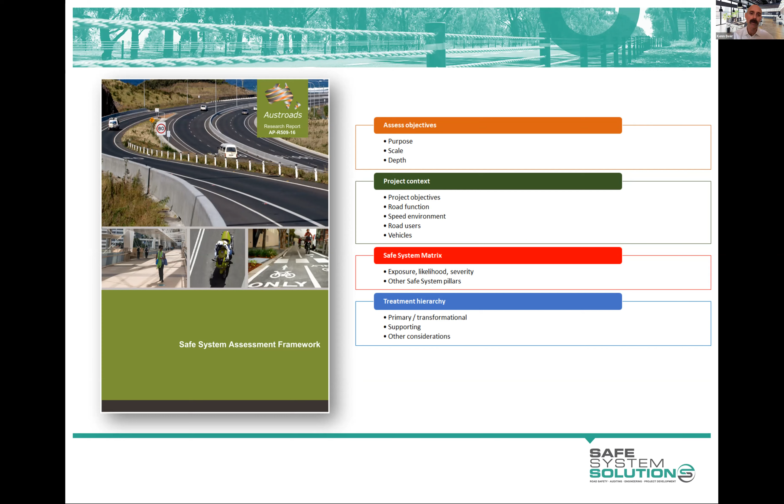So since its release, two jurisdictions have put out supplementary guidelines, that's Victoria and South Australia, to try to clarify some of the things that Austroads was very unclear about, to actually say, Austroads said this, but we actually, in practice, are going to do this because, as I said, there hadn't been any Safe System assessments done when that document was released. So some of these jurisdictions found out when they were doing them that they needed something to be altered a little bit. So there's some slight variations within these documents.

The process I'll be talking you through sort of aligns with these documents and Austroads, and I'll point out where there's just one or two little things that you need to keep in mind if you're just solely following the Austroads document. Like always, pop your questions into the chat as we go, but I'm going to start at the end. And this is one of the outputs of a Safe System assessment.

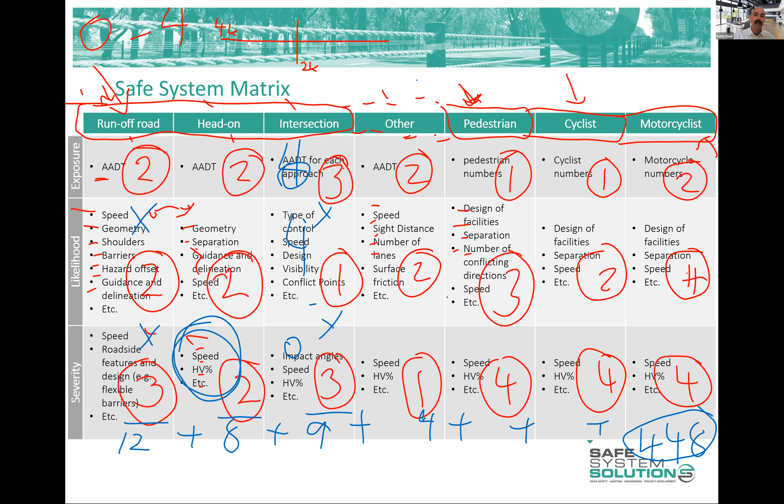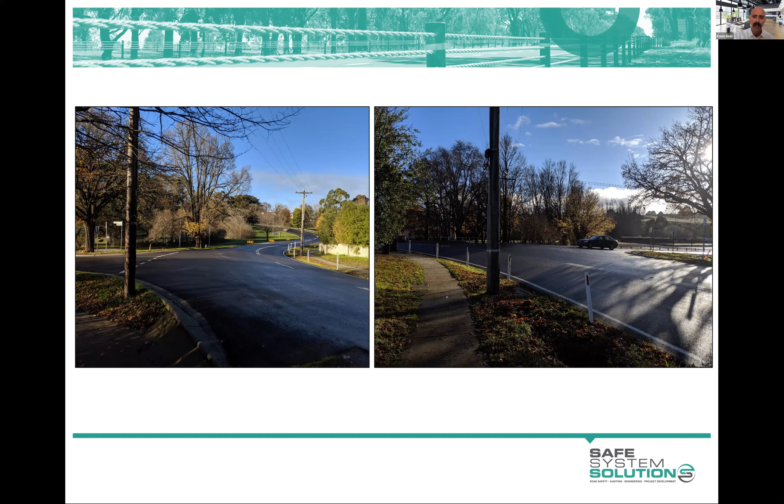They're planning to either build a roundabout at that location, or to build a signalised intersection using the existing road alignment, or to build a conventional T intersection with the signalisation and some lanes and the like.

So what we do first is take the existing conditions, the existing road environment, and say, how many vehicles are exposed to crashes? Now, we don't need a huge amount of information written into this cell, because you just use the scoring reference sheets and you just put in your numbers.

The likelihood, though, you see factors that increase the likelihood, and they're dot pointed out, and factors that decrease the likelihood, and they're dot pointed out. And head-on crashes, factors that increase the likelihood, factors that decrease the likelihood, and they're dot pointed out, and then a score is put in there.

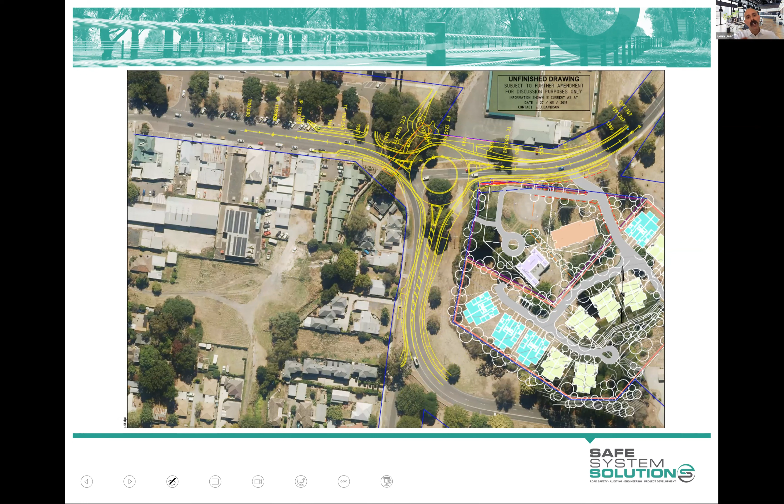Then what you do is you copy this, the whole table, and you paste it. And you look at their design. You saw there was a design of a roundabout. Go back to it actually, just so you can see. So there you go. Now you look at the roundabout and you imagine that built. Okay, they've built this roundabout just like it is on this design. You go to that existing conditions matrix that you have created, you've copied and you've pasted, and you start to manipulate it by saying, okay, I'm going to cross this out because those have been removed.

Those have been removed. But I've got to add these things in here because they decrease the likelihood, and we haven't accounted for those. And we're going to move this score down. Cross these ones out, add this one, change that one. Not too many changes on the severity, okay. Bit of a change here, bit of a cross out. So you can see you're using your existing conditions as the base and then you're changing. And you do that for each of the designs they give you.

So you go back and you get the existing conditions matrix here, copy it again, paste it for your signalized modified T, and go through and make changes and alterations. Then you go back and you get the existing conditions matrix again. You paste it. You make changes to it based on the conventional T. You keep doing that for as many design options as are provided to you. And that gives you then the ability to get total scores.

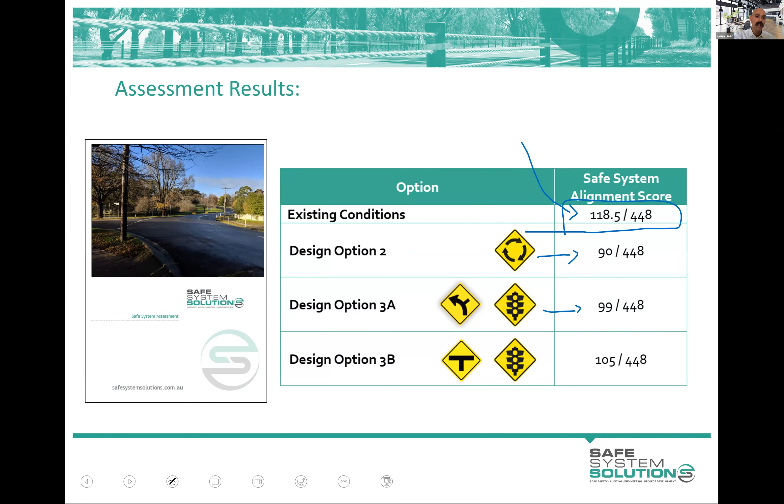And you could say, okay, for the existing site, we've got 118.5 as the safe system alignment score. The roundabout brought that down to 90, the modified T to 99, the conventional T to 105. So everything's making it a bit safer, a bit more aligned with safe system principles. The roundabout happened to do the best job of that. There would be further things that could be done. It's at 90; could we get it lower than that? We'll talk about those shortly. But that helps the project team, at least at one point, to be able to make some decisions or add this into their consideration.

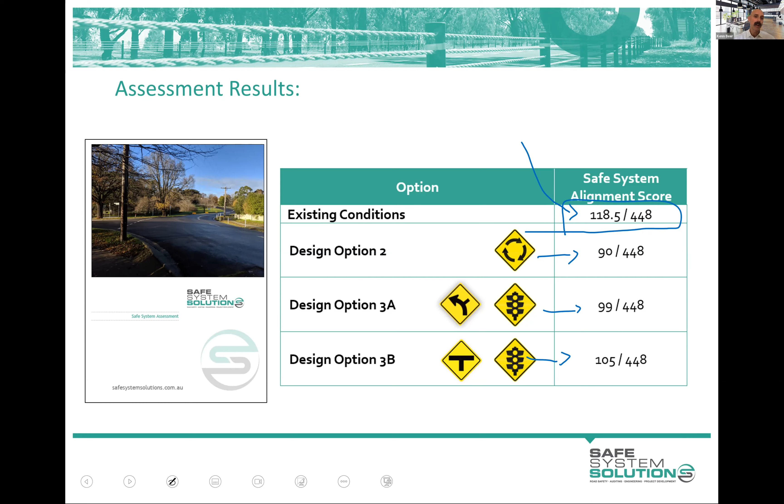But I do like this better as the output to look at, because you're immediately able to see, okay, the roundabout's doing a good job everywhere, although we're a bit worried about the cyclist one. The roundabout was the lowest score, but a lot of that score is dominated by cyclists. So maybe there's more we could do to reduce the risk for cyclists, or you gather this sort of intel. Or maybe there's a decision made, no, we actually have to go with this option. So where are we getting risk, and how do we reduce these scores as much as we can?

And that's what you do then as an assessor, is to say for each of these options, the roundabout, the modified T signalized, the conventional T signalized, and all the other options, what could this project team do to make that even better aligned with safe system principles? And these are recommendations, ideas for the project team to consider.

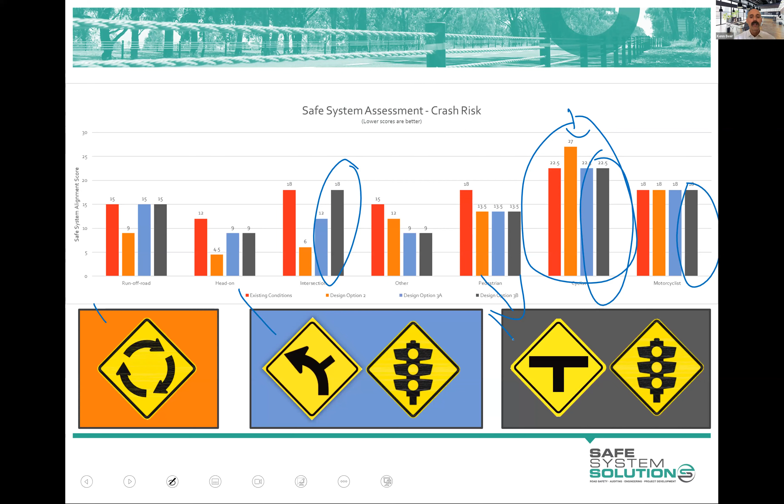And we categorize those into either primary, that virtually eliminate the potential for death or serious injury, or supporting. Supporting are good road safety treatments, but they're not expected to virtually eliminate the potential for fatal or serious injury crashes within that column.

So Austroads has provided within the Safe System Assessment Framework a whole list of primary treatments for different crash types and a whole list of supporting treatments for different crash types, which may spark ideas for you. A lot of the time, things like, we were just talking about median barriers. Median barriers are a primary treatment. Roundabouts are a primary treatment for that intersection crash with passenger vehicles. It may need some more tweaks for other road users.

So a lot of the stuff that's been a bit more traditional, like signs, lines, surface conditions, they're supporting treatments. They're good. We want to get all of that right. But we know that even if you get a high-speed road with really great surface, good line marking, a bit of sealed shoulders, good signage and everything like that, people can still leave that road, and they will leave that road, or they'll leave their lane and they'll enter the other lane. So we know that it's not eliminating that crash potential.

So we are going to ask you to go to a site. We're going to give a design to you, and it'll be close to the address you've given us. And we'll ask you to go out there because you're going to try and do an assessment of the existing conditions, and then you're going to imagine the design built at that site. And we want you wearing a high-vis vest when you're out there. We don't need you to be out there measuring lane width or anything like that. So you can just stay back and observe the site.

We don't want you to be a hazard to others in any way, making them walk around you onto the road or anything like that. We want you to park safely. We've looked at all these sites to ensure that they can be done safely by you.

But make sure you park safely, don't block people's sight lines or those sorts of things. And we've got a safe work method statement, which I'm going to jump you into shortly and show you, which is just to try to ensure that you will do your part in being safe when you're out there as well. We've done our risk assessments and made sure that they're low risk for you to go out there. But we just need to make sure you're going to be acting accordingly.

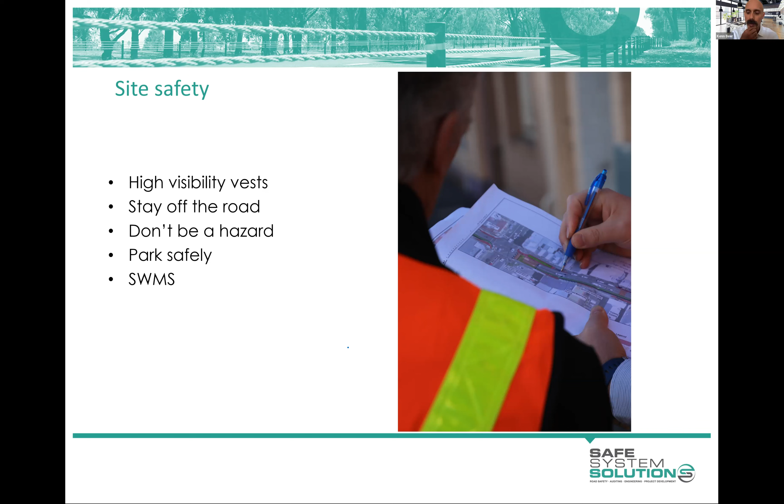So I'm going to stop the slides here, and I'm going to jump into the learning management system, but happy to answer anybody's questions as they come up. Okay, there it is. Okay, so you're all very familiar with the learning management system. One thing I will point out while I'm here is in the reference documents and resources, you've got the TMR templates. Don't use those for the assignment, but if you want to use those, that's all in there.

This one, the Safe System Assessment Framework. If you open that up and you jump down to around page 17, 18, you can see pedestrian treatments, and you can see their options, treatments, and their primary treatments. Then these ones are supporting treatments.

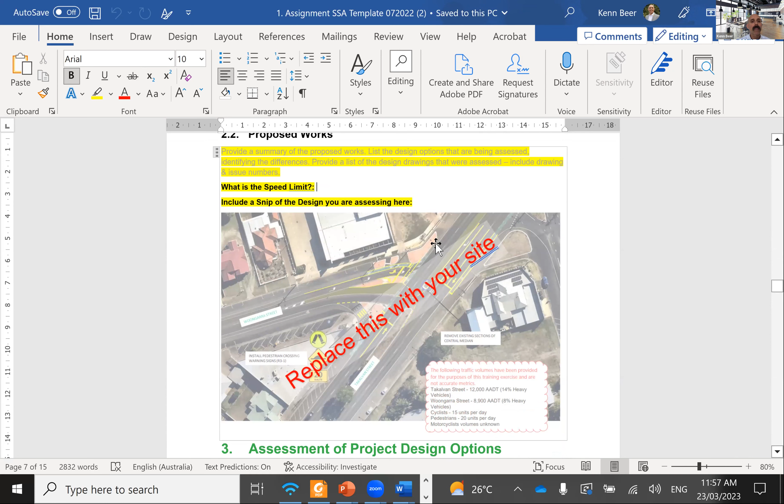Then a bit of a description of the proposed work, the existing speed limit at that location, a snip of the design, so it's there, so it's packaged up nicely. An assessment summary, well, you do this at the end because you can't summarize it until you've sort of been through it all. The scores of the existing conditions and the score of that one design that we've given you. And a graph. Well, you've got to fill out all your matrix first before you get to the graph, but I'll show you that in a second.

So then you fill out your matrix and you start with the existing conditions. And for this one, you're going to write a bit of information in there, and you're going to put a score for existing conditions. You're not going to put a score for the design. Try to spell that out here. So there we go. Because for the existing conditions, you don't have a design to score yet. You can fill some dot points out here, maybe 4 or 5 things to fill out there. Maybe fill a few out here. And then you're going to put an existing condition score there based on what you're doing. So you fill all of this out.

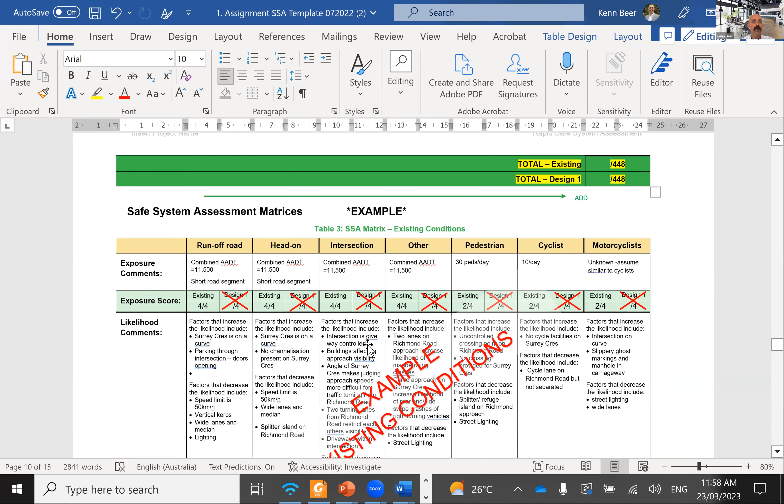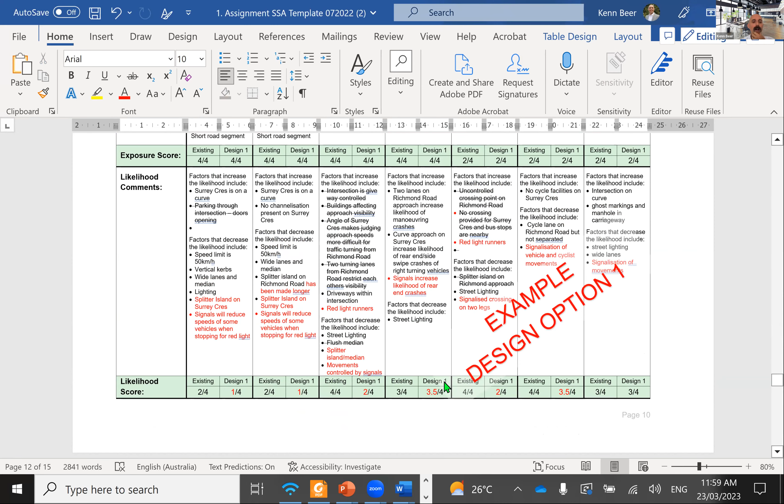Once you're happy with it all, you're going to copy the whole thing and down. So here's an example of the existing conditions. You can see there's no scores in there. And then an example of design. So you can see it's got scores in the design bit as well. Delete that. And then you're going to put yours in. Paste it in there and go, yeah, great, okay. No, those ones have been removed. Strike those through. Although we've added this new one, so we've got to put that in there. And the new score goes down to 1. Just make that red so everybody knows that's new. And there you go. You do that throughout the whole thing.

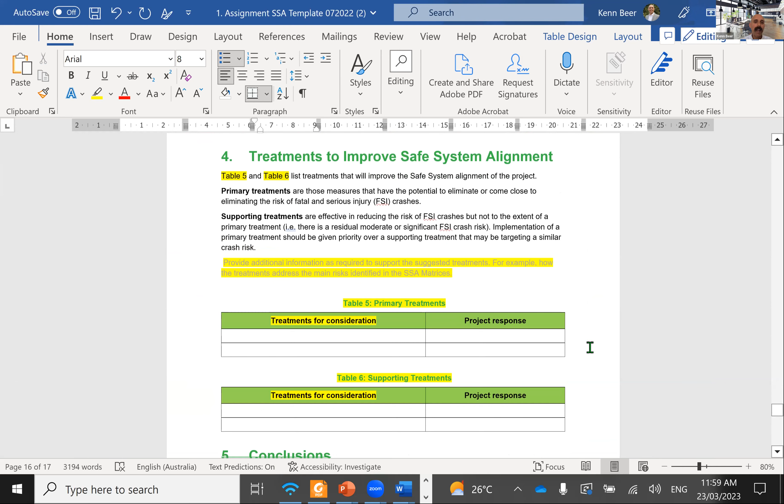So that's that. And then for that design that you were provided, you're going to do some pondering and thinking, hey, how do we make this better? How do we make this better aligned with safe system principles? And you come up with some ideas and you write an idea in here, a median barrier. Primary treatment. Maybe you'd flesh that out a bit. Type of barrier, where you might start it and end it. You don't need to do the design for them, but those are the sort of things.

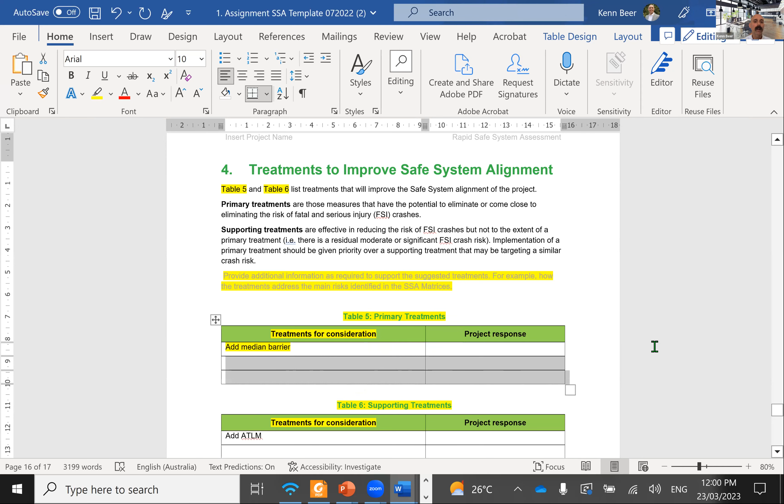And audio tactile line marking. So that would be a supporting treatment. Good treatment, not going to virtually eliminate run-off-road crashes, but it's something that you can do. And you list a few of them, as many as you want. Add some rows if you want. And you can add a few. You don't need to write a conclusion for us.

And then the last thing we want you to do is a picture of you on the site with a high-vis vest on. Prove to us that you actually went there, you looked at it. It's one of our requirements to complete a safe system assessment course. Back before we did anything online, we'd all go out to different sites in small groups, and we'd come around. But this one, you're going to do it because it's close to your home and the like, but we need to tick off, yep, they went to a site, they looked at it, they're actually looking at real world stuff.

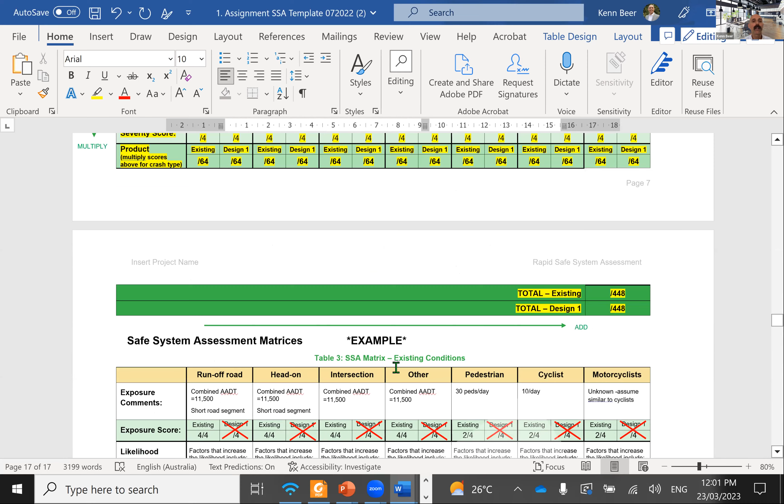And that's it. So then you will take that. Oh, sorry. You filled out your matrix, you got all these scores. Then you're going to come back up here and you're going to want to put those total scores in here, and you're going to want to put a graph in here. To make your life a bit easier, I think I've got it open here. Yeah, a little graph generator in Excel. You'll do this yourself in 5 minutes, but we're just trying to save you a bit of time. Put your scores in.

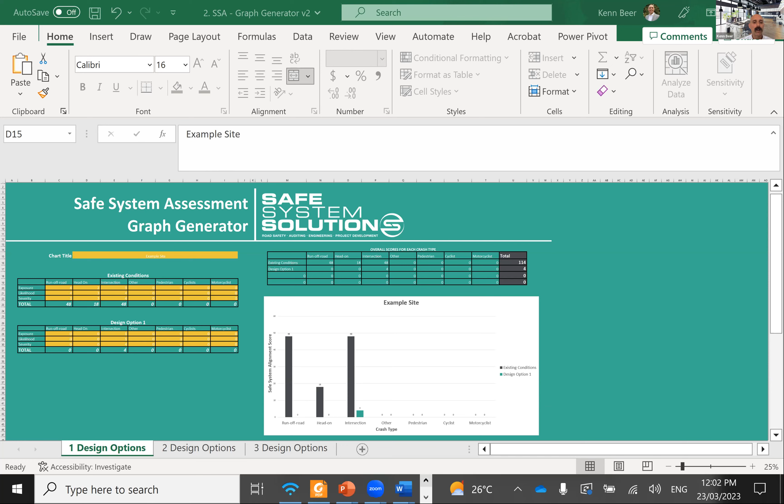And it produces scores for you for the existing conditions, and then for the design. And you can then just snip that and go back to here and replace this one with that new one. Okay. So I've covered a bit there.

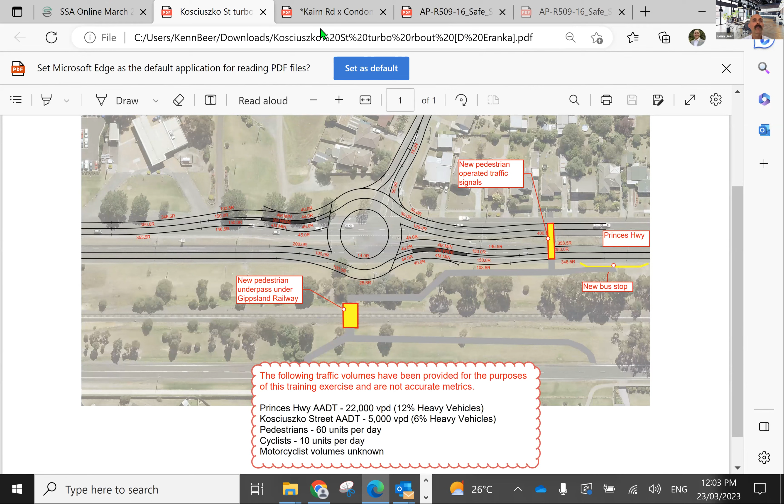Does anybody have any questions about the task that they have? Oh, sorry, some of these grab my attention. Do we have a hand up there? There's a turbo roundabout coming in there. Very interesting. Yeah, feel free to pop your hand up if you want to ask a question verbally. Pop your hand up and then we will give you the ability to unmute yourself.

Hello. Hi, Ken. How are you? Good. How are you? I'm good too, Ken.

I just wanted to ask you that I'm working in Bendigo, but I'm not staying over there, so I won't be able to go to the site that you mentioned just now during the next couple of days. Probably I'll be going to the site next week. That's okay. We can give you another site if it's more convenient. So that's not a problem. You just need to get in contact with the team.

We've tried to streamline this down to something that's not overly consuming of your time. We hope it can be done in a couple of hours for you, where you have a look at the site, which is convenient at some point in the next week or so, and then download the template there, you just write stuff into it and prepare it. So a bit of work to do.